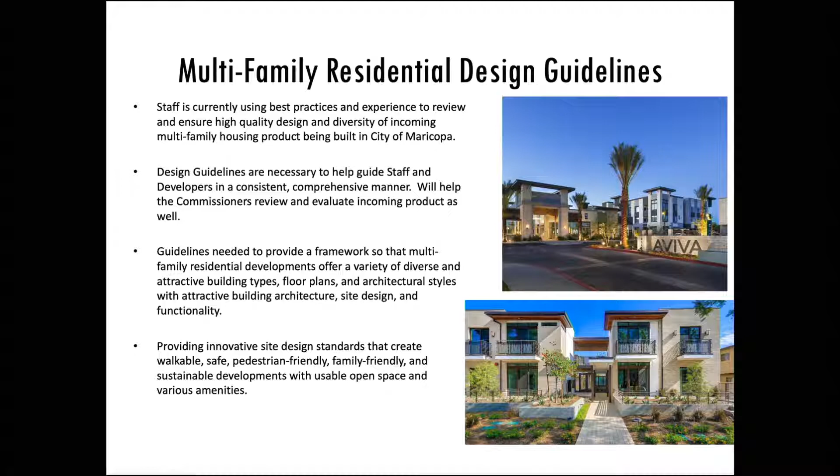These guidelines are provided so it can provide a framework so that multifamily developments can offer a variety of diverse and attractive building types, floor plans, architectural styles with attractive building architecture, site design, and functionality.

So staff is going to concentrate for the first draft on three areas. Site design, which includes neighborhood character, building placement, orientation, parking and garage placement, landscaping and shading, and architectural design, so primary entries, massing and scale, articulation, and using a variety of materials.

And then the third element will be sustainable and healthy design. This will include low impact development, which is basically stormwater management, green building options, which will work in conjunction with our existing sustainable incentive program, daylight views and natural cooling, and solar.

The timeline for this is basically starting in a couple weeks. We're going to go over the outline as a staff. We'll have a variety of team meetings, though these are kind of up in the air. It might actually be more like 3 team meetings where we're going to draft, work as a team, draft our first guidelines, and then we'll come back to P&Z, roughly, maybe earlier, but roughly at this point in October, where we will take any sort of feedback from Planning and Zoning before we present it to City Council for final incorporation.

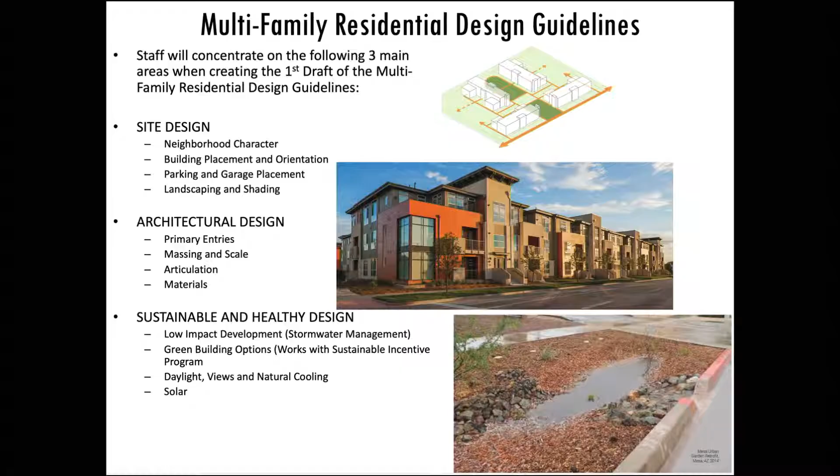But I still think we need to be a little vague so we're not rewriting the guidelines every time the fad goes in and out. Right now the color is dark, but 10 years ago it was lighter. I think variation of color is more what we're looking for — splashes of color, not a monotone color for the whole building. That's the problem when you have dark blue, dark gray, dark black — it's all dark. You need some color mixed in there.

Okay, any other questions? Miss Rachel, did you have any questions? No, I did not. Thank you, Chair.

I need to apologize because I skipped over the call to the public. So we're going to backtrack and go to the call of the public. If anybody would like to address the commission, please step forward. Remember, we cannot necessarily discuss, but we can help you out. Seeing none, we'll move on.

5.2, DPR 21-01, Fuze 520: request by Z Modular for approval of their site, landscape, photometric, and elevation plans for a proposed 348-unit multi-story, multifamily development generally located on the southeast corner of State Route 238 and Loma Road. Discussion and action.

Madam Chair, Commissioners, thank you. As a refresher, DPR 21-01 for Fuze 520 is coming back to the Commission for review of the elevations. Staff at this time does not have anything else to present — nothing has changed on our end from the first time you saw this product. I'll now turn it over to the developer to present the updated elevations.

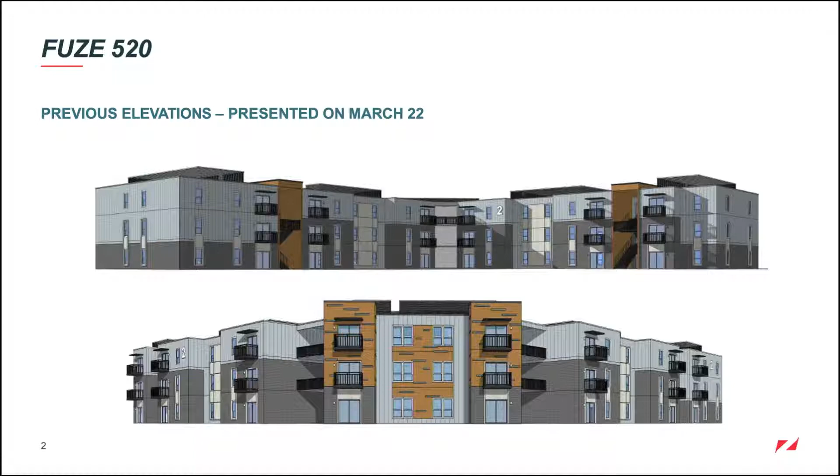This is what we started with last month, and Commissioner Yoakum, this probably reflects a lot of your comments. I think, good or bad, it led to a good discussion and the city adopting some design guidelines. In the interim, we've come up with some things that will work really well. This is a second version of an exhibit you saw last month — again, kind of boxy and plain.

Without the context of what's happening around it, it's really hard to get a feel for this community. Last month, you shared that the elevations felt flat and didn't really show what it looked like on the ground. So we've worked on exhibits that illustrate that better, and you'll see renderings with the articulations included.

I think our colors, unfortunately, were kind of industrial in tone as well, so you'll see exhibits showing the vintage wood spruce, the dark nickel, the light fog — colors that give more variety and better design. Lastly, I think we had a lot of design that was a little boxy and lacked visual interest, and I'll cover that as I go through the presentation. In the elevations we shared last time, you really couldn't see the patios on those first floor units.

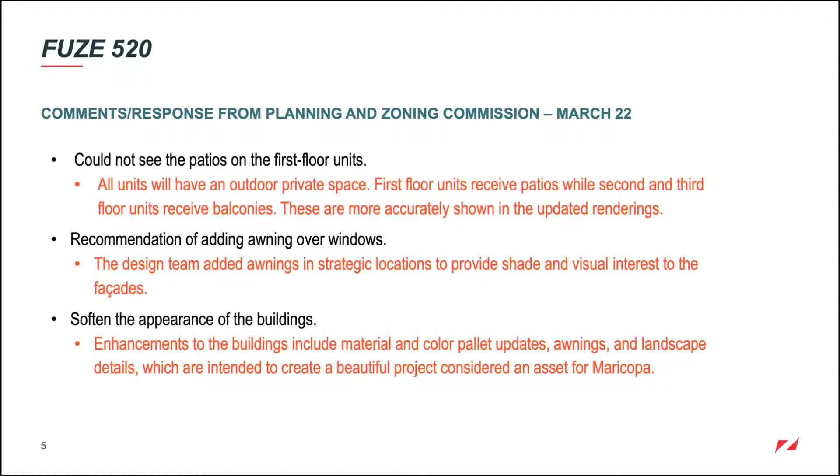It was always intended, but without you seeing the visual rendering, it's hard to get an idea for how it feels. There was a recommendation of adding some awnings, which we've been able to put in some strategic locations, and overall soften the appearance of the buildings. With that direction in mind, we went through and started adjusting some things, and I hope you'll see we've come a long way.

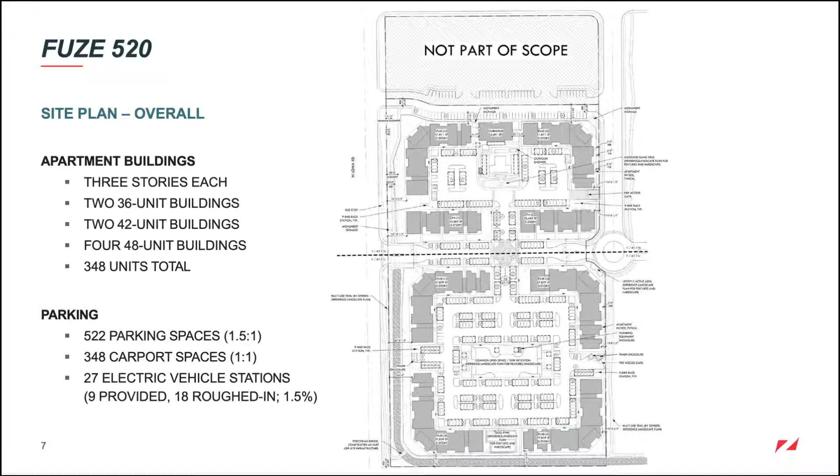You've seen a lot before, so I'll cover it quickly. There's a north building and a south building, about 348 units total. We exceed the required parking. We also have 27 electric vehicle stations, which is something we're proud of because the new wave of development should be including these things, recognizing that more and more people are using EV cars.

A quick colored version of it, but this is some things we just didn't have ready for you last month or two months ago. So you can kind of see how this feels, not in a flat way, but in a more simulated way with regard to our open space area, for example, and our resort aspect. The pool floaty does not come with the leasing, but we think it's a great little thing to drop in there for the architect. You can kind of see how this feels.

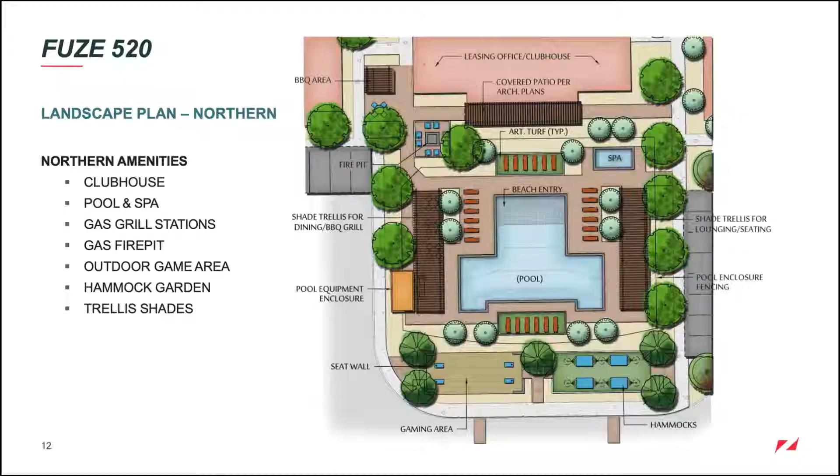I'll toggle back and forth between this 2D version and the 3D rendering of that. The southern amenity is less of the pool recreation and more of the outdoor play, sports, rec, where kids can play soccer or whatever in that field, and a splash pad.

And then more importantly, our office. The office breaks up the design of the buildings by having something that looks a little bit more professional in nature. The ability to have that wood accent really sets this apart from the industrial feeling you had recognized before. Just having that different type of texture certainly softens the building and gives it a bit more of a modern feel for the site.

When you see something like this, it's really hard to get an idea for it, but when you put it in a perspective like that, you get a better understanding of how it comes together. And then this is some of the views from the edges of the property at different points interior to the site.

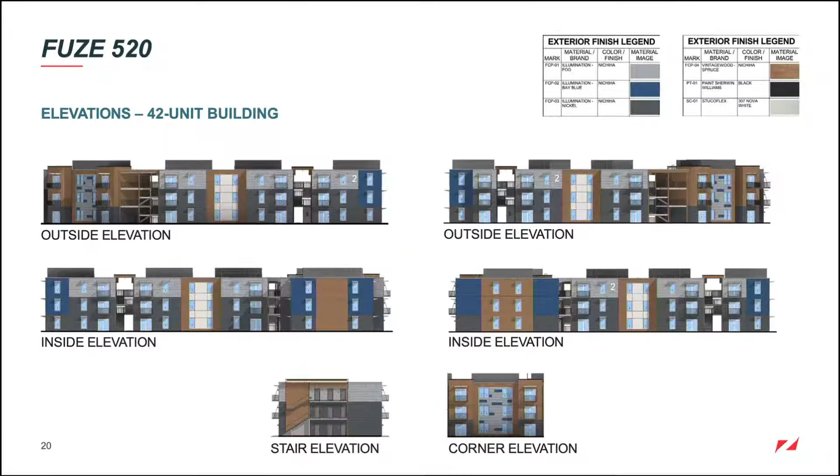I wanted to be brief and respectful of your time, but I think most important, the key thing for us was to be able to soften the colors, provide a variety of materials, tones, and textures to accomplish a better quality design than you guys have seen or expected in the past. I hope this becomes a bit of an expectation for development going forward to be more responsive, better prepared. At the end of the day, when I look at your design review criteria, it meets the criteria outlined in your zoning code section 18.155. So with that, I'll be respectful of your time and appreciate it, but happy to answer any questions you might have.

All right, thank you very much. We're going to start out online. Miss Rachel, did you have any questions or comments?

Thank you, just a comment. I think you guys did a great job with your resubmission. It shows the detail that was requested, touched on those points, so I really do appreciate that. I know there was one concern that Chairperson Huggins is going to mention, but I'm sure about the traffic. But I think you did a great job with the colors, showing the different layers, the textures. It looks a lot more appealing for our city, so I appreciate the changes.

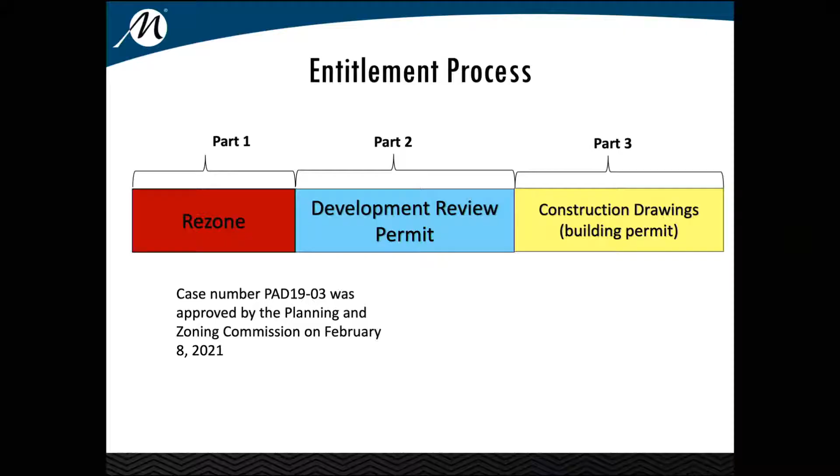Discussion and action. Well, welcome back. Madam Chair, Commissioners, thank you. This project is on the second step of the entitlement process. The zoning for this property was previously approved earlier this year through PAD19-03. The site is roughly 17 acres in size and currently sits vacant with a proposed use of multifamily and an existing zoning of PAD, like I previously mentioned.

This is the site location, just across the street from our previous project, the Fuze 520, located on the west end of the city, just south of State Route 238. This is the overall site layout. The development has 182 units with a mix of 1 and 2 bedroom units. The required parking for this development was 372 parking stalls, and the developer has provided 375.

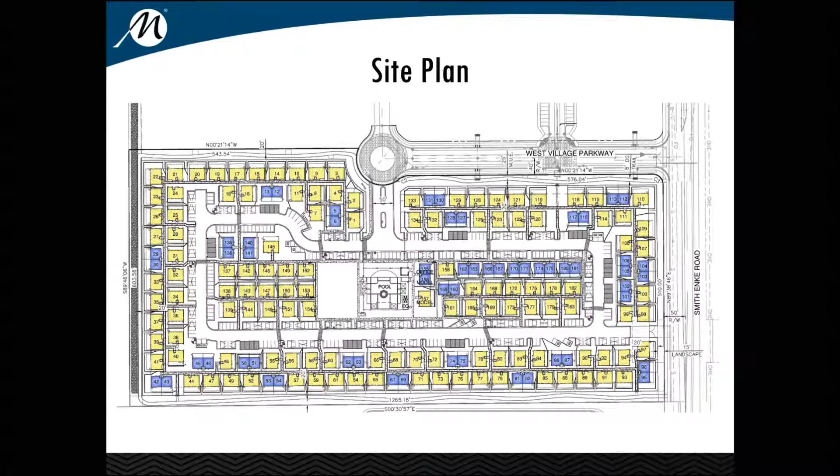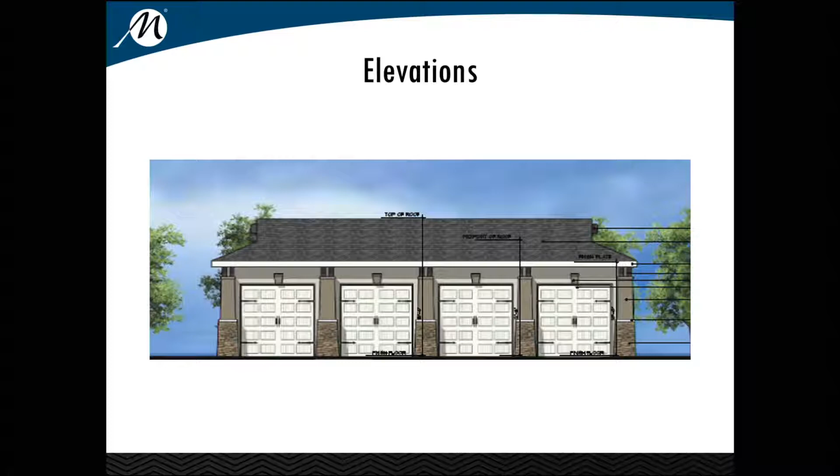These are some of the elevations for the on-site garages that the developer plans to provide. And this is the main entrance to the development.

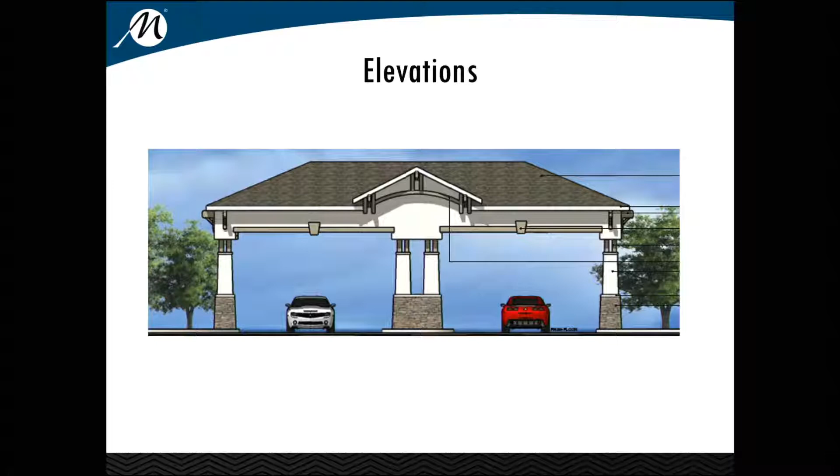The criteria for approval that the commission must use to review this project is the following: the commission should consider the overall design of the project. Is the project a suitable environment for occupants, visitors, and the general community? The commission should keep in mind the color, materials, and landscaping for the development, as well as whether this is compatible with neighboring developments, and is this a visually interesting built environment?

As required by the zoning code, a sign was posted on the site. Notification letters went out to 600 feet to all property owners, and as of this time, staff has not received any public comments regarding this project. Staff recommends approval of DRP 20-12, subject to the conditions set in the staff report.

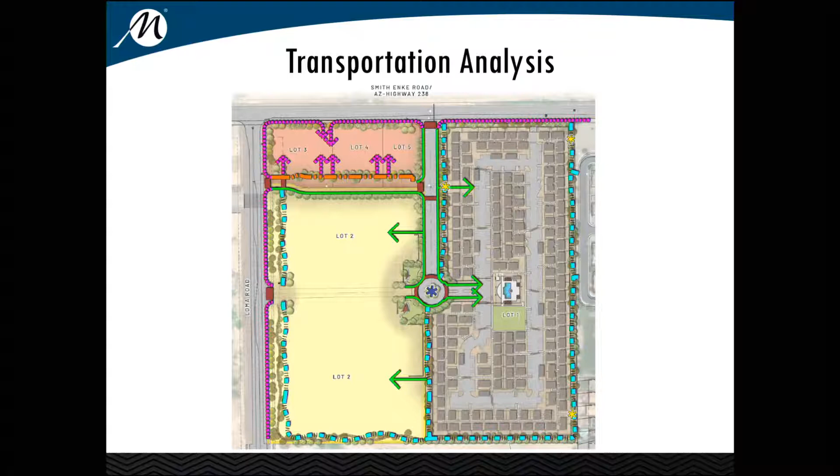Okay, great, because I was more concerned with going eastbound from the community, not into Lots 3, 4, or 5, but I was more concerned about accessible points for the community to go to, for example, Bashas' shopping center, because they'll break down the wall. And that's what I wanted to prevent.

You mean eastbound on 238? Yes, across the villa project that you're reviewing tonight, there is a trail that heads eastbound. Right, I see the star, that's a point of access. That's why I was wanting to make sure that it was there, because they did that in Acacia Crossing. They knocked the wall down, and we finally ended up putting what we call the hole in the wall, because they kept breaking the wall.

The other question that I had that I really didn't quite understand the answer to, according to the plat that I saw, is that the right-of-way landscaping was going to be addressed per the plat, but it didn't say anything about the external and interior roads for the landscaping. I want to ensure that there's some sort of mechanism within the stipulations that the city has put, or something, to ensure that down the line the landscaping is not diminished and it's still going to always be intact.

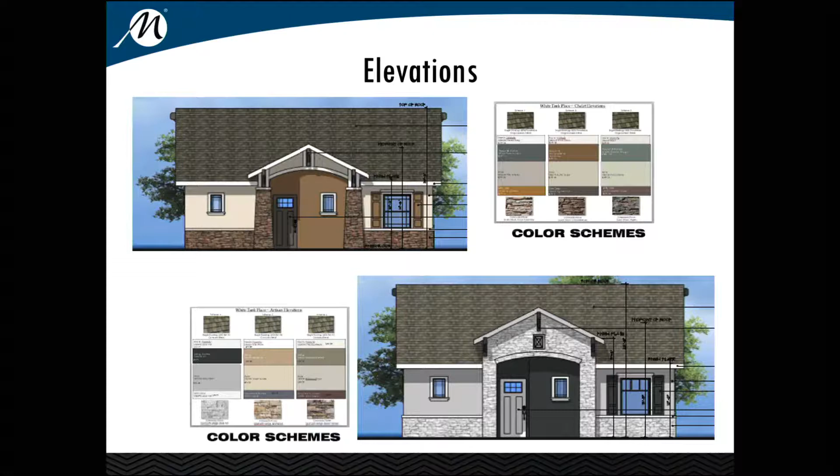Okay. The only other thing that I wanted to say was that I commend you guys on this project. It looks phenomenal. It looks more like a single-family home community, a very welcoming community, more than it does a multifamily community. I think the residents of Acacia Crossings are going to be very pleased with this, because some citizens who approached me were very concerned that their line of sight was going to be taken back and they'd just be looking at apartments, because I think they were envisioning the Fuse project backing up to them more than this, which I don't even think they're going to see, even if this wasn't there.

So I commend you on that, because it does really, really look homey. The colors and everything were great. Outside of that, I think all my questions were answered, and I'm satisfied.